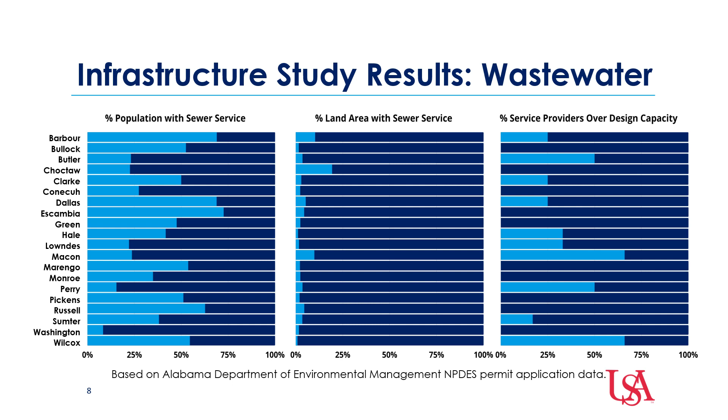So these locations are in need of expansion to hold their current flow rate, and they need to increase their capacity by expanding further if they want to add any additional users to that system.

So what do people do whenever they're outside of a sewer service area, if they don't currently have wastewater infrastructure where they live? In that case, it is up to each resident to take care of their own wastewater on their own property. The most common type of on-site wastewater is septic tanks with drain fields. 25% of homes in the US use septic tanks with drain fields. And you can see in this image here, this is a septic tank.

The basics of how it works is that the water comes from the house, from the toilets, showers, and everything else, and goes into the septic tank. Fats and oils rise to the top, solids settle down to the bottom. While they're in the septic tank, some bacteria starts to help break down those solids and those contaminants in the water. And as the water is leaving the septic tank, none of those solids are coming with it. It's just the water leaving out. And at this point, it is still essentially untreated. It's going to be high contamination water.

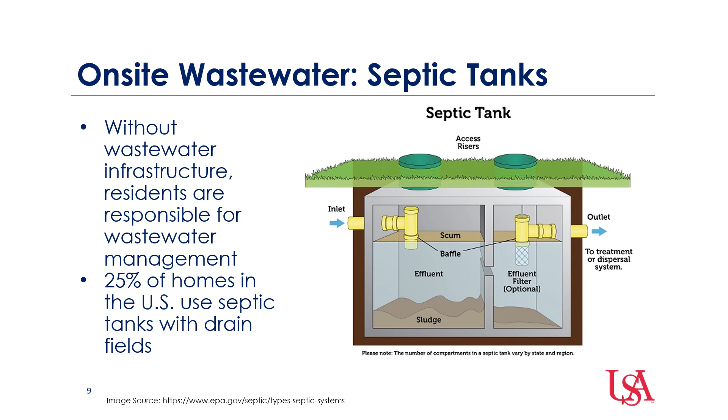Once that water leaves the septic tank, it's going to flow through some pipes into what's called the drain field. The drain field sometimes can be made with gravel, with special pipes. It can be different materials, but basically, the purpose of the drain field is to spread the water out and allow it to trickle downward.

While that water is percolating down through the soil, all the contaminants in that water are removed via biological processes. Bacteria breaks down the pathogens and the organic matter, and the sand and dirt helps to filter things. So by the time that water reaches the groundwater below, it is cleaned.

But issues do arise with septic tanks and drain fields for various reasons. One is very fast percolation rates. Say you have high sand content in that soil, it gives you a very high percolation rate. That water just flows right through it really quickly because there's a lot of open space between those grains of sand. So in that case, the water's going to move through too quickly, and the bacteria is not going to have a chance to break down those contaminants.

The next issue comes with very slow percolation rates. If you have soils that are very high in clays, all of those little particles are going to be packed very close together. There's not a lot of space between them. The water percolation rate is very slow. So what happens is as water's being added to the drain field, it's not flowing downwards, so it's either going to back up into the house or it's going to rise to the surface of the ground, and you're going to have untreated wastewater exposures.

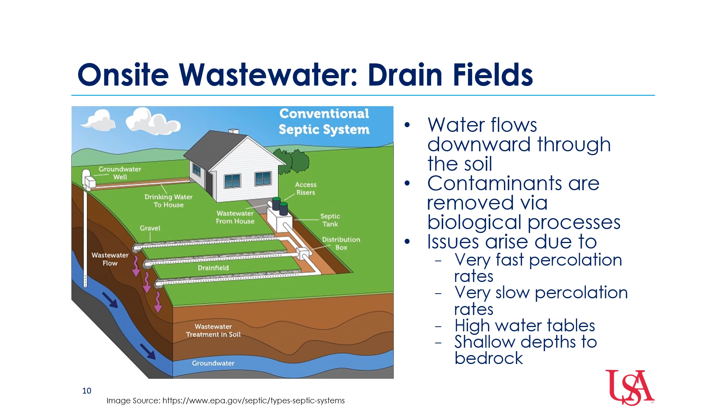Other issues can arise due to high water tables and shallow depths to bedrock. So what's happening in the Alabama Black Belt is that septic tanks are failing. Why this happens is because, like I said earlier, the Black Belt has those very rich black soils. They're called blackland prairie soils, and they're primarily made of clay. These are vertisols, which means that they shrink and swell in response to changes in moisture levels.

Shrink-swell soils have inadequate infiltration of water because, as you can see in the image, the dry soil has all of these cracks. You add water to it, it's going to flow through those cracks really quickly, but as soon as that's wetted, it swells up and it looks like the image of the wet soil here. And once that swells up, there's nowhere for water to go through. It can just only sit on top of it, basically.

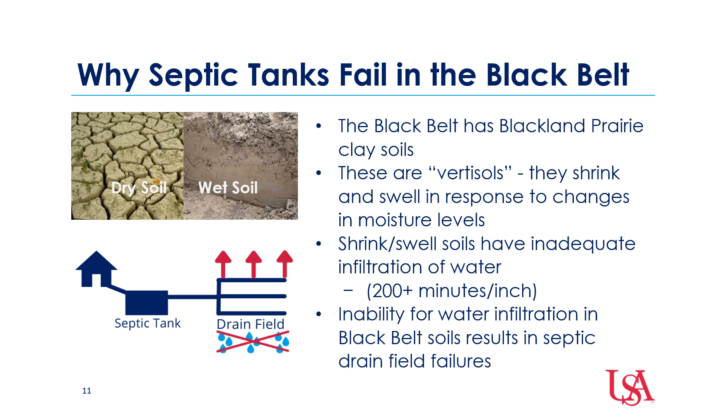These soils in the Black Belt take more than 200 minutes for 1 inch of water to infiltrate down into that soil. And so that inability of the water to infiltrate means that the septic tank drain fields will fail, because if the water can't go down, it's going to either go up or back up into the home. So what happens for these families that don't have wastewater infrastructure where their home is, and live in the Black Belt where their soils do not allow them to have a septic tank with drain field because it won't work in those soils?

Well, if they have the finances available, they can get advanced on-site wastewater treatment systems that can handle it. But a lot of these families are low income and they don't have the income to solve this problem reasonably. So what they do is they resort to using straight pipes.

And what straight pipes do is they lead from the home out to somewhere in the yard, maybe to a wooded area in the back, maybe just to the ground surface. Either way, they're leading directly from these people's showers, toilets, and sinks and depositing untreated wastewater on the ground surface. And what happens with this water on the ground surface, even if it's far away from the home, really back on the property in a wooded area or something like that, we know Alabama gets a lot of rain.

We have high precipitation rates, and whenever the rain comes through, there's runoff over that land, and any area that has untreated wastewater deposited is going to spread, making that entire area unsafe and potentially exposing people to untreated wastewater that can have bacteria, viruses, and helminths in it.

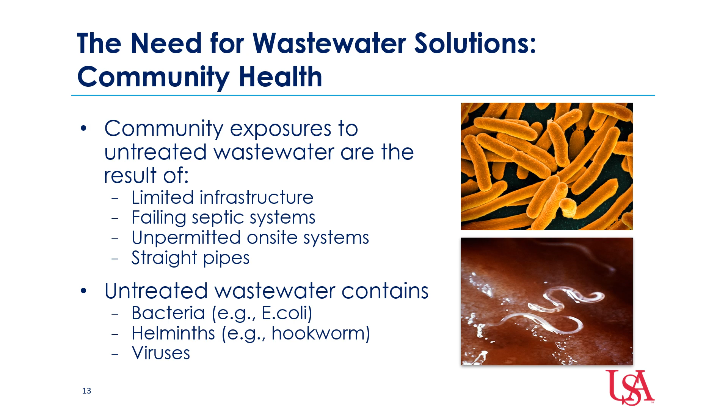There was also a study done in Wilcox and Hale counties in 2016 and 2017. Those are actually in the Black Belt, and similar results were found. As a result of this limited infrastructure, the failing septic systems, as well as unpermitted on-site systems and straight pipes in the Alabama Black Belt, what we end up with is community exposure to untreated wastewater, which contains bacteria, parasites, and viruses. We don't want community exposure to this, because that can result in higher levels of illness in the area.

In addition to community exposures, untreated wastewater being on the ground surface can lead to issues with environmental health. First, we have hypoxia. That's whenever the bacteria in the wastewater depletes the oxygen supply in rivers, streams, and other waterways. Whenever oxygen levels are too low, fish cannot survive and they start to die off.

The next issue we have is eutrophication. This happens because of excess nutrients in the wastewater. Wastewater contains nitrogen and phosphorus, which act as fertilizers, and whenever that's in a waterway, it causes algal bloom, which adds to the oxygen depletion and fish kills that you get with hypoxia.

The next issue is chemical pollution, because wastewater can contain many different chemicals, heavy metals, and all sorts of things that can pollute those waterways.

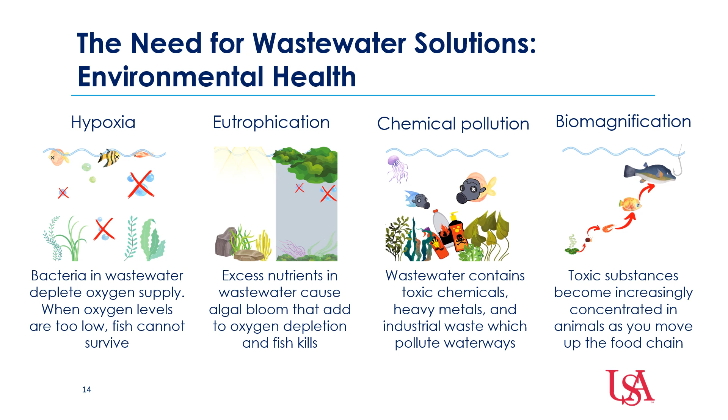And then finally, we get biomagnification. What happens with biomagnification is that toxic substances become increasingly concentrated in animals. A small animal might get a little bit of that in its system, a bigger animal might eat a whole lot of those smaller animals and collect more in its system, and it keeps getting higher and higher until you get to the large fish, which are the fish that humans are fishing and eating. By the time you get there, you've got a higher concentration of those toxic substances.

Another need for wastewater solutions is the economic impacts. Whenever you don't have wastewater infrastructure in place, that negatively affects the economic development of an area. And like I said earlier, the Alabama Black Belt is a low economically developed area overall. What happens is whenever there's not the necessary infrastructure for a business to exist in an area, they simply won't set up branches there.

Say if you had a restaurant or something like that, would you want to set up in an area that did not have wastewater infrastructure, where you couldn't even get the more cost-effective option of a regular septic tank with a drain field for your business? You'd have to get more advanced, higher cost treatment. Why would you do that when you could go somewhere that already has that infrastructure in place, so it's easy to connect to the line, pay your monthly bill, and you're done with it? So that's what happens in these areas — a lot of businesses don't want to set up where they don't already have the infrastructure in place.

So what happens whenever you do invest in infrastructure? First, the investments are made in the wastewater infrastructure, and that creates jobs for the design, construction, and operation of that infrastructure. That also means materials will need to be purchased to build it, which stimulates the local economy. Once that infrastructure is in place, new businesses can open in these areas, which creates further job creation because those businesses need employees, and those new employees now have more money available, increasing spending in the area.

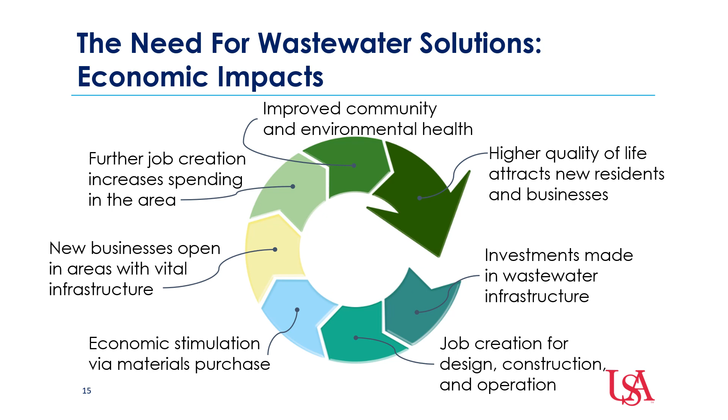And then overall, you get improved community and environmental health in the area, and all of this together creates a higher quality of life in the area, and attracts new residents and new businesses. At that point, you might get to a situation where, once again, the wastewater infrastructure in place is not sufficient for the population. But if that happens, we simply invest more in wastewater infrastructure, and the cycle continues, building that local economy.

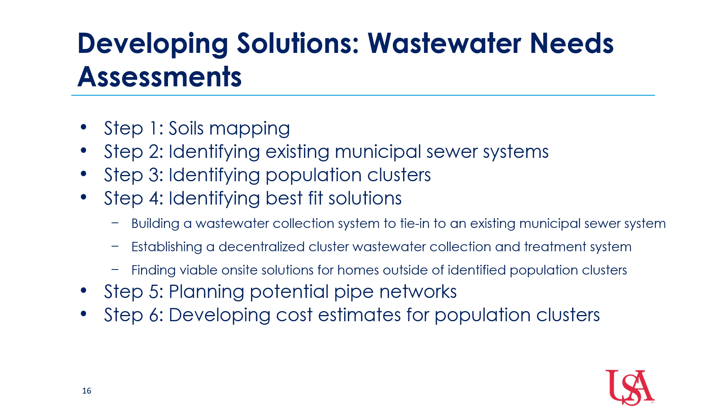Now, to work on a plan for addressing these wastewater needs issues in this area, we began working on wastewater needs assessments. There are several steps to these, and I'll go over these in more detail in just a moment, but to run through them quickly: the first step is soils mapping. The second is identifying existing municipal sewer systems. The next is identifying population clusters in the area. After that, it's identifying the best fit solutions, whether that's building a wastewater collection system to tie into an existing municipal sewer system, establishing a decentralized cluster wastewater collection and treatment system, or finding viable on-site solutions for homes outside of identified population clusters. The next step is planning potential pipe networks, and finally developing cost estimates for these population clusters that are identified.

So going back to that first step, soils mapping. To create these wastewater needs assessments, the first step was utilizing the USDA Web Soil Survey to look up the soils and whether or not they are appropriate for septic tank absorption fields. This soil survey is a great resource. It has a lot of different ratings available for different uses of land, but what we were most interested in was the septic tank absorption fields. We did one of these for each of the counties in the Black Belt area.

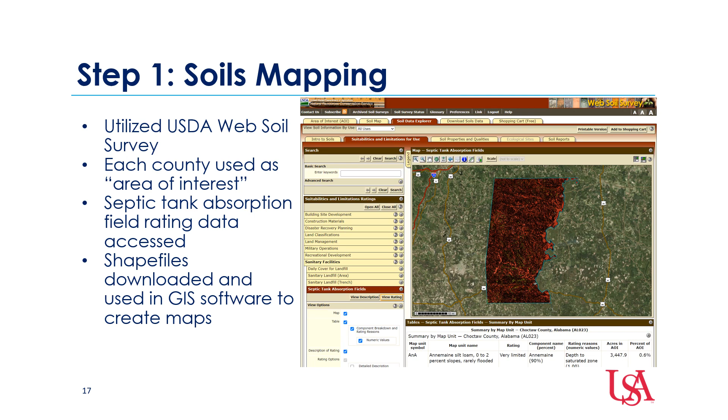We downloaded these shape files and used them in GIS software to create maps. As you can see on this map, most of this land area is red. The red color means it is not suitable for septic tanks with drain fields. Yellow areas are somewhat suitable, so they might need a mound system put in, something slightly more advanced than the regular drain field, depending on the exact conditions. Areas in green are perfectly fine to go ahead and put in a septic tank and drain field, they'll work just fine. This Choctaw County map is a good example of what the counties in the Alabama Black Belt look like for these septic tank absorption field ratings, mostly red area.

Next, we identified existing municipal sewer systems. We used the Alabama Department of Environmental Management's records online. They have outfall maps and an e-file system with all their NPDES permits available to look at. We found all of the existing sewer service providers in the area. On those NPDES permits, we found what was listed as the sewer service area. There's not a map for the sewer service area, so we estimated these as the city limits of the identified area. Then we found the design flow rate and average flow rates on these permits as well.

These are used to identify which systems are currently fine, which systems currently need upgrades, and which systems can currently accept different small clusters to be tied in if they can accommodate those additional flows, or if they might need to expand their system to accommodate additional flows.

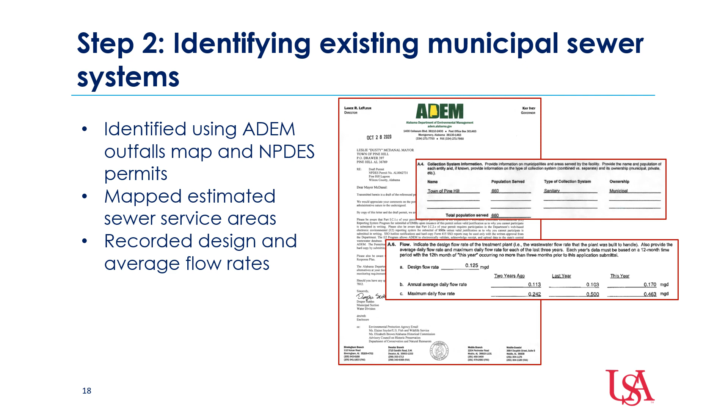Next, we used county GIS records and satellite images to identify population clusters. Our criteria was at least 85 people per population cluster. We used a density of at least 25 homes per square mile, and a maximum cluster size of a 5-mile diameter. Anything outside of these identified population clusters would be considered areas where homes need to find on-site solutions, and anything within these population clusters could either be tied into an existing system if they're nearby enough, or would be an individual decentralized cluster system with a collection and treatment system.

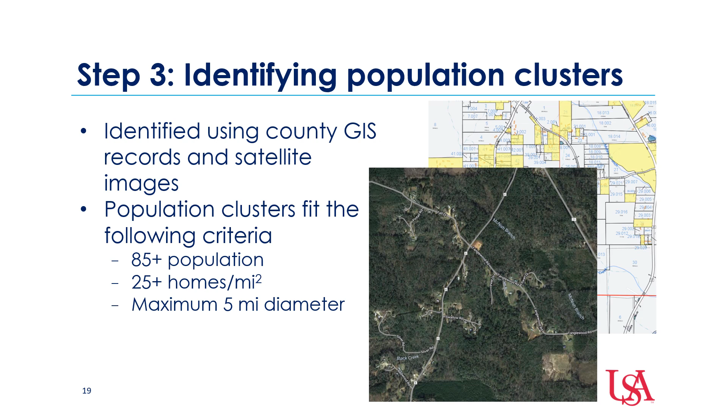So for the idea of tie-in clusters, any population cluster that's within 6 miles of an existing sewer service area is what we considered a potential system for being tied in to that system. And what that means is that there would just be a collection system built, and then pipes would lead that to the existing wastewater treatment facility there. And that saves these new clusters cost on not having to have their own wastewater treatment facility.

STEP systems are recommended. That's septic tank effluent pumps. And the way that these pumps work is the water comes from the house into a septic tank where solids settle out and only liquids are pumped to treatment. By doing that, you're able to have very small diameter pipes that reduce construction and materials costs for putting in the collection system versus one of those traditional gravity sewers with the large pipes.

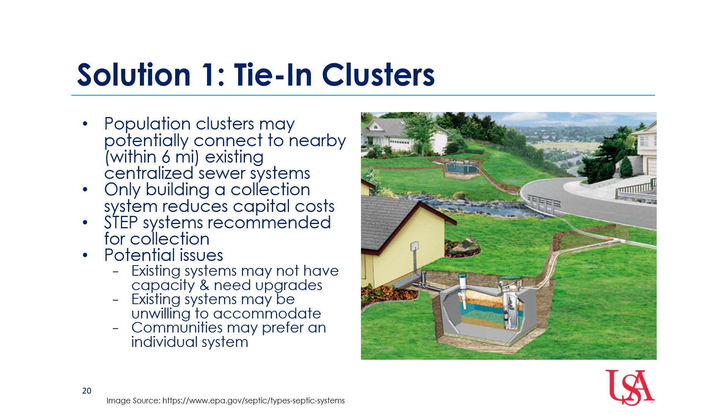Potential issues with the tie-in clusters. First of all, the existing system may not have capacity. It may need upgrades according to what those design flow rates are and what their current average flow rates are. Additionally, existing systems may be unwilling to accommodate other population clusters outside of their current service area, or communities may simply prefer to have their own individual system and not have to rely on a nearby municipality for their wastewater treatment. So the next solution available is decentralized clusters.

And if you look at the image here, the top image shows a centralized model, and it's kind of a cartoony version. Imagine these are many, many more houses. This is an entire large city municipal area or what have you. But as you can see, the pipes connect every home in this area and pipe all of that untreated wastewater to one area where you have a large wastewater treatment facility.

In the decentralized model, you have smaller clusters of these populations that have a shorter pipe network leading to a smaller wastewater treatment facility that is right next to that population cluster. By doing that, you have less piping necessary, which ends up saving these communities funds because there's less capital cost for that large collection network. And these can be customized to fit the needs of neighborhoods, small towns, rural communities.

They're built as you go because a lot of these smaller wastewater treatment facilities can be made using modular treatment technology. So you have one module for a certain amount of population. If there's a certain amount of population growth and you need to expand the system, you add a second or a third module, however many you end up needing as the community grows. And there's no capital loss to overbuilding a treatment plant to meet potential future needs.

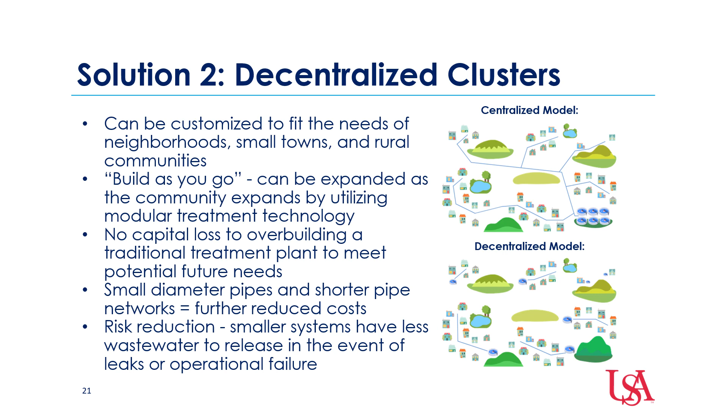Also, once again, we would recommend STEP systems for this, which allows for those small diameter pipes. And having those small diameter pipes and the shorter pipe networks further reduces costs. And finally, there's risk reduction because smaller systems have less wastewater to release in the event of leaks or operational failure. And the third solution available is viable on-site treatment.

Any homes outside of an identified cluster would need viable on-site wastewater treatment options. Homes with suitable soil conditions can use septic tanks, and that's why we have those soil maps made so you can see what areas are able to simply have those septic tanks with their drain fields. But homes in unsuitable soil conditions require more advanced treatment.

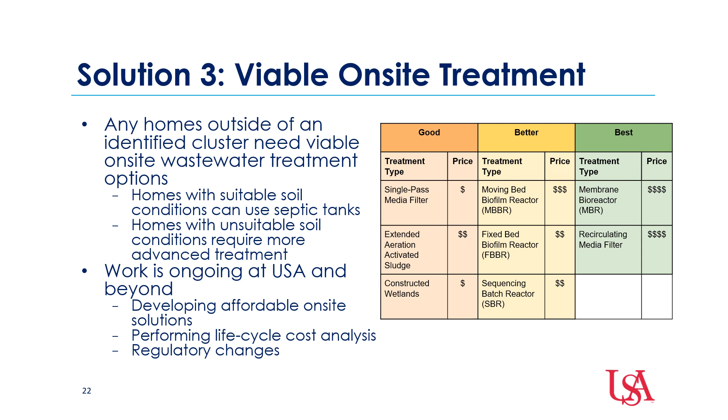Work is ongoing at the University of South Alabama and at other nearby universities in Alabama, as well as within the regulatory agencies. There's work going on to try to develop affordable on-site solutions and perform life cycle cost analysis on these technologies, and also to potentially make regulatory changes to better suit the needs of this region.

Step 5 of creating these wastewater needs assessments is planning potential pipe networks. And I want to stress potential because these aren't necessarily what will be built in these areas, but it gives an idea for what might be necessary and what kind of materials there will be, the number of connections that there will be for these population clusters, and in the end we're able to get an estimated flow rate for that cluster as well.

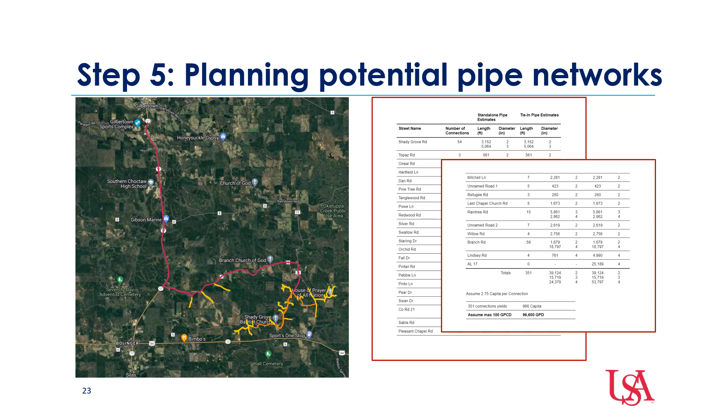And then using these potential pipe networks, we're able to develop cost estimates for each population cluster. And once again, we are having a lot of changes in our economy right now. There is high inflation, so these estimates might not be very accurate long term, but it does give us an idea and allows us to compare one cluster to the next, and just, you know, see how these systems might play out.

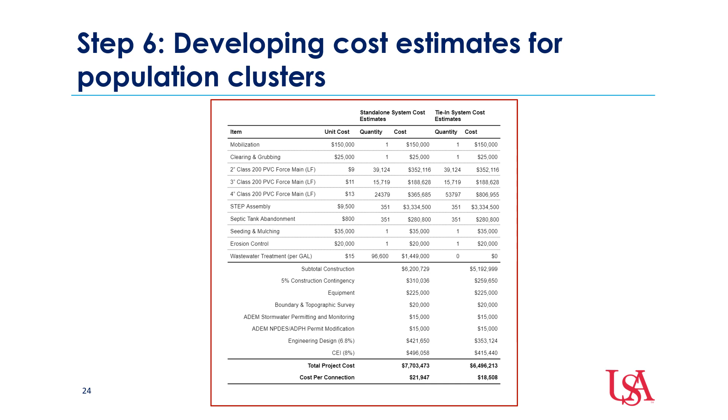And finally, here are some of the maps created with the wastewater needs assessments. We use Choctaw County again for the example. You can see on the left, you've got those different soil ratings for the septic tank with drain field absorption field ratings. And you can see the small black areas are the estimated sewer service areas that are currently available. And the areas with just the outline, those are different population clusters that have been identified.

And then on the map on the right, we use some color coding to show which population clusters could potentially tie in to which existing sewer service area. And the population clusters that just have an outline without the color in the middle, those would be the standalone decentralized population clusters that would have their own sewer service treatment as well as their collection system there.

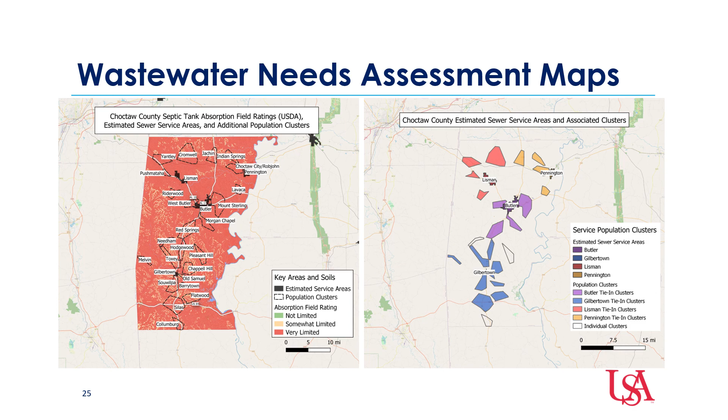So what we're hoping to do next is to demonstrate these decentralized models and technologies for a population cluster in an area in the Alabama Black Belt. One area that we're looking at is Newbern, Alabama. This small town is located in Hale County in the Alabama Black Belt. It is a rural community. They do have impoverished residents. Not everyone in the town is low income, but there's a significant enough low income population that this would be an area that really represents the communities that are having issues in the Black Belt area.

They currently do not have an existing sewer system, and they do have the clay soils, which are causing septic tank and drain field failures. There is evidence of straight pipe usage. They are more than 6 miles from the nearest existing service area. So they fit all of the general characteristics that we are looking at that are causing issues for communities in the Black Belt. And additionally, they do have high-speed internet access available because of the Auburn Rural Studio, which is located here. And with that high-speed internet, we would be able to use that for remote monitoring of a demonstration system.

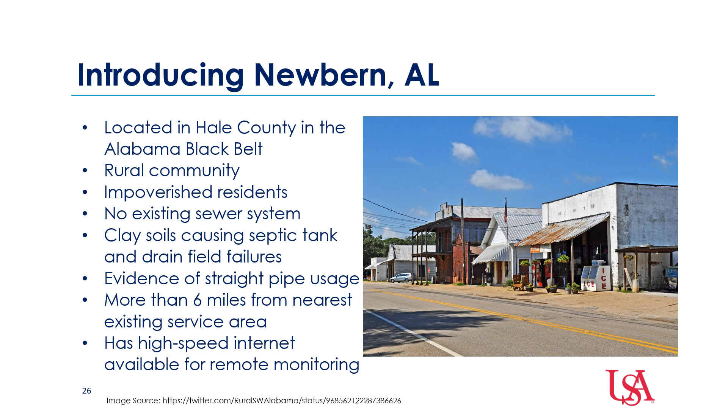The Newbern Decentralized Demonstration is a project funded by the American Rescue Plan Act as well as Columbia World Projects. It will serve 400 plus residents. It is planned in 4 phases. The first phase just being the Auburn Rural Studio. The second phase would include some key local buildings, including City Hall, the library, places like that. And then phases 3 and 4 would include local residents in the area in this system. If it's successful, it will serve as a blueprint for the implementation of additional decentralized wastewater cluster treatment systems.

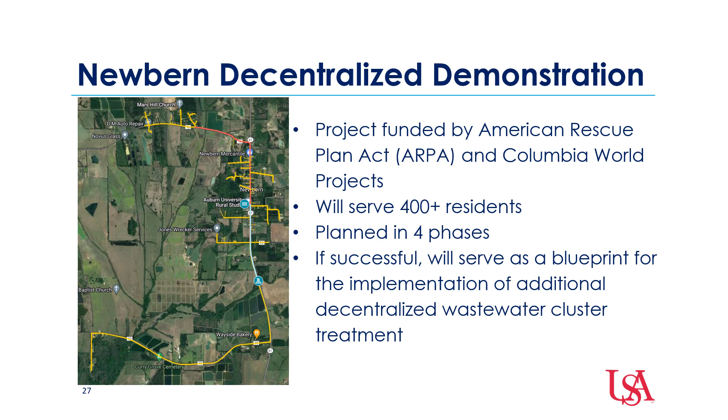So with this decentralized demonstration, what we're hoping to do is demonstrate the applicability and sustainability of decentralized cluster models and technologies. We would be using the STEP system, which is the liquid-only septic tank effluent pump systems. Those have the small diameter pipes that I explained earlier. They utilize directional boring instead of large excavation, which is great for 2 reasons: 1, it's more cost effective, and 2, it's less disruptive to the local residents whenever it is being installed. And also, these systems don't rely on gravity. They function on all terrains, which really simplifies the planning and design of the collection system.

They will also be utilizing modular treatment systems. These have low operation and maintenance. They have small footprints, low energy requirement, and remote sensing can be used for monitoring. So it really simplifies the wastewater treatment facility versus one of the traditional larger wastewater treatment plants.

Also, we are hoping to use effluent dispersal via surface application. This would be either spray irrigation, drip irrigation, or overland discharge. And the good thing to this is that it provides plants with nutrients for growth. So once the wastewater is treated and disinfected, it still does have heightened amounts of nitrogen and phosphorus, which are good for fertilizing. So they can be used to water non-edible crops, like maybe pine trees or something like that.